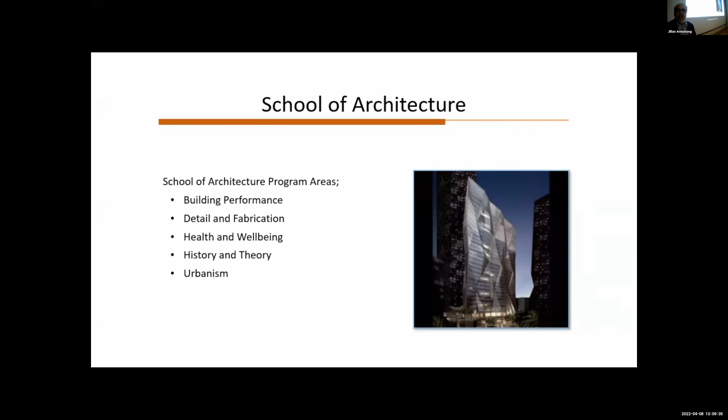I'd like to take the opportunity to speak with you a little bit about our Building Performance Program, who's the sponsor of this event today. Our School of Architecture consists of a number of programs which are focused mostly at the graduate level. They include building performance, detail and fabrication, health and well-being, history and theory, and urbanism. As I mentioned, today's program is sponsored by the Building Performance Program.

We address aspects of overall performance through the integrated design of structural, environmental, enclosure, and related systems. We have a very distinguished list of faculty in our building performance program, including my friend Jim, who will come up shortly. I'll introduce him as a Purvis Fellow. We're very fortunate to have him on our team for 2 years, and we're delighted that he was able to help us with organizing this event.

Areas of teaching and research for our building performance faculty include environmental systems, structure, construction, and comprehensive design. We also offer courses and seminars in specialized areas that some of our faculty offer from time to time.

As I mentioned, our programs are mostly focused at the graduate level. We have two concentrations in the building performance program that I'll describe, and a number of joint degree programs I'll also describe. These are formal concentrations that appear on your transcript as a student.

One is the building performance concentration, under the Master of Architecture, or MArch, degree program. That's been in place for a year or two and is very popular. We also have a structures concentration under our Master of Science in Architectural Studies degree program.

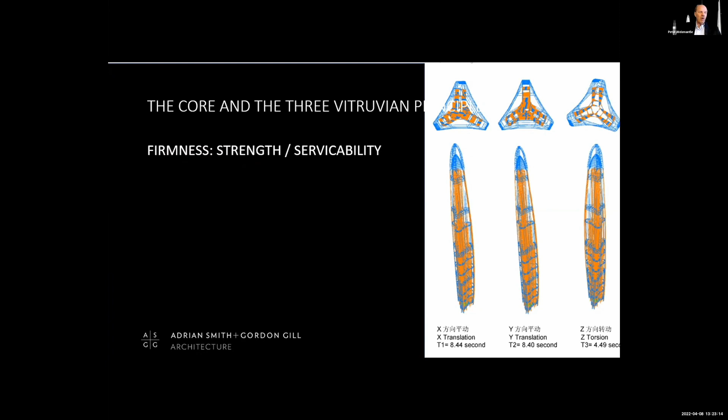Strength - it's what allows the building to stand up, basically. And standing up isn't just about gravity, because a tall building, especially a super tall, is really designed like a cantilever, a beam stuck in the ground. These images show the three modes of translation that every tall building needs to withstand with respect to lateral forces, wind, and seismic activity. The core is really the primary element that withstands those in the current crop of super talls.

Commodity is functionality, and that includes elements in the core here, things like the exit stairs, the service elevators, the toilet rooms, and the fan rooms. This construct allows the building to function - that's its utility.

So it ticks off all three Vitruvian principles in my mind. But we're talking about the primacy of the center core, and the primacy of the center core in the current typology is really not even debatable. Of all 58 super tall buildings taller than the Empire State Building constructed to date, basically all have a center core.

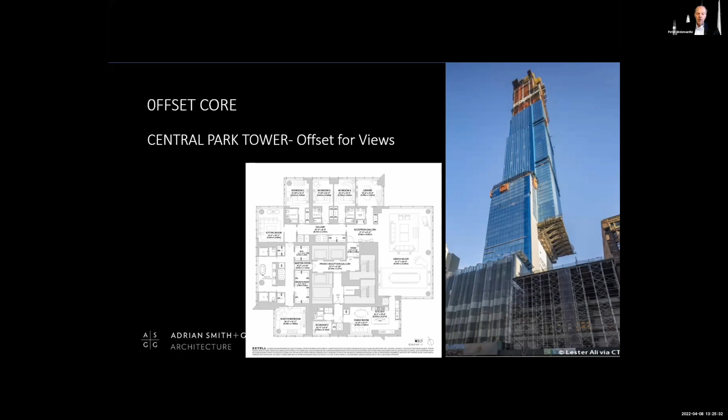Not that there aren't other typologies - the center core is not the only way to go. There are reasons that the core might not be in the center of the building. For instance, you might offset the core - this is an example, Central Park Tower, where the core is to the southeast of the floor plate, so that there can be unencumbered views of Central Park and Central Park West to the north of the tower.

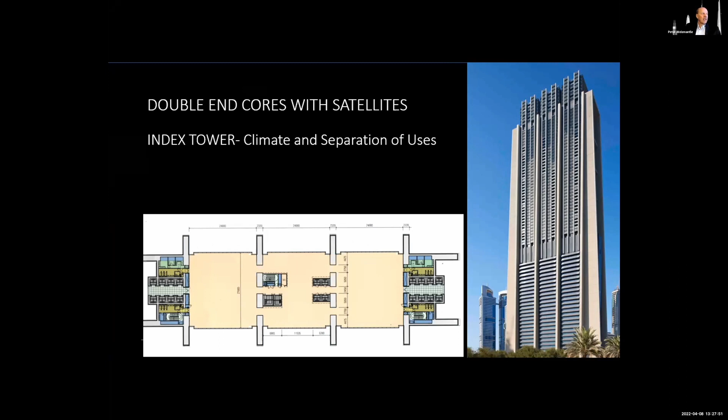But let's go back to the center core. Again, I said the primacy of the center core, and why is that? I think it ends up in the center for reasons of optimization and serendipity. It's the optimal structural location, the optimal location for occupant circulation, and the optimal location for services distribution, as well as allowing for a consistent perimeter and maximum perimeter lease span. It's also an optimal location for unencumbered views.

Furthermore, the serendipity part has to do with the structure. The constructability using reinforced concrete in the center of the building allows for greatest flexibility. It allows for the use of climbing formwork, which we'll talk about in a little bit. And also the fact that the core, being a very robust and thick-walled structure—in some cases we're going to talk specifically about a project in China nearing completion called Chengdu—the perimeter walls of this core are over 1 meter thick.

So it's a wonderful place, a great place. It's very robust, and it's a great secure place to put things like exit stairs, to put your riser shafts, especially for your fire life safety systems, in very protected, very secure positions.

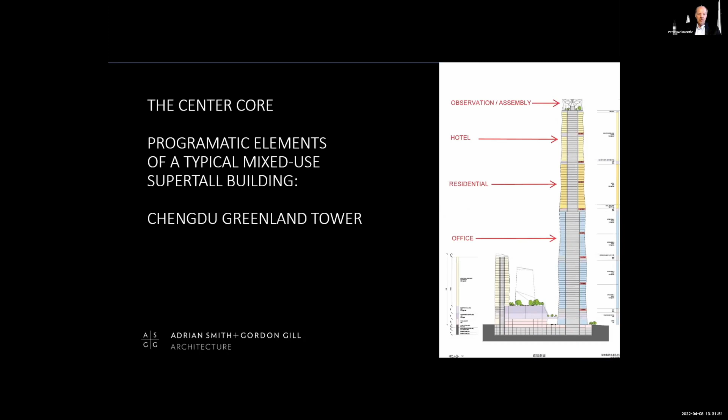The Chengdu tower is really a prototypical super tall building, mixed use, with approximately 120,000 square meters of office at the base of the building, this blue zone here, about 50,000 square meters of residential in this intermediate zone, and a hotel of about 48,000 square meters. Then at the very top, there's an observation/assembly space we call the Sky Club, in the crown of the building.

This tower is nearing completion in Chengdu, China. It's 468 meters tall, which puts it even taller than Jin Mao, but it's still well down the list of tallest buildings in the world these days.

So in the core itself, what are the elements shared by all super tall building types? First of all, occupant elevators—that's probably the most obvious. The occupant elevators and elevator lobbies, but also there's a whole set of elevators that serve for firefighting, for service, for freight, and for the back of house functions of a tower.

There's also exit stairs with landings and vestibules. There's also the MEP service risers and rooms, which very importantly include the smoke control, pressurization, and extract duct risers that allow the exit stairs in these very tall buildings to be free of smoke should they be needed. So in looking at that in plan...

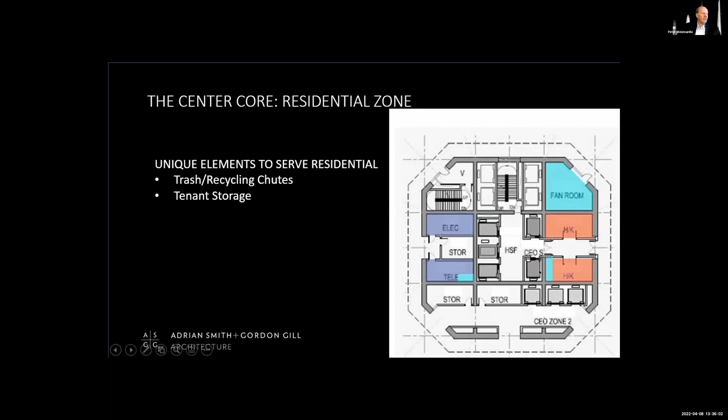As we continue up the building, we get to the hotel zone. Now several things have happened. The structural core still exists, but it's now become the corridor wall to the hotel rooms around the perimeter. The corridor for the hotel, serving the hotel rooms, is now inside the core. So the structural core still exists, but the architectural core has now shrunk down to be as minimal as possible. Remember, the owner of the building, our client, is making money from the area of the building that he can lease. So the smaller we can make the core, the more space is left over for the actual revenue producing uses of the building.

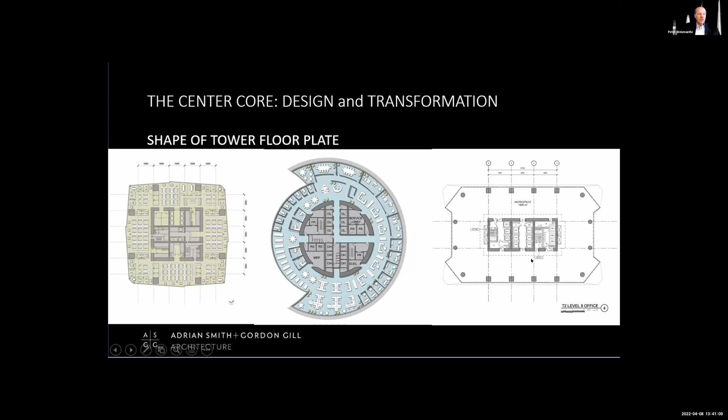Examples you saw previously: this is Jin Mao at the bottom, or this is a Jin Mao-like core, where at the bottom the building is actually more or less square. This is a circular core, again because of the shape of the tower floor plate. And then of course your kind of bog standard, very traditional rectangular core.

So let's go back to the mixed use elements, and I'm going to be talking a lot about Chengdu as I finish up my talk here. Remember, office, hotel, residential, and observatory or assembly at the top, the tower club.

The next element that determines how you can transform the core is perhaps the most important element. And I know Javier is going to be talking about breaking some ground in new technology being developed for elevators. But living in the present and having to get these things built, we still have certain limitations with respect to elevators, such as having maybe one or maximum two cabs in a shaft.

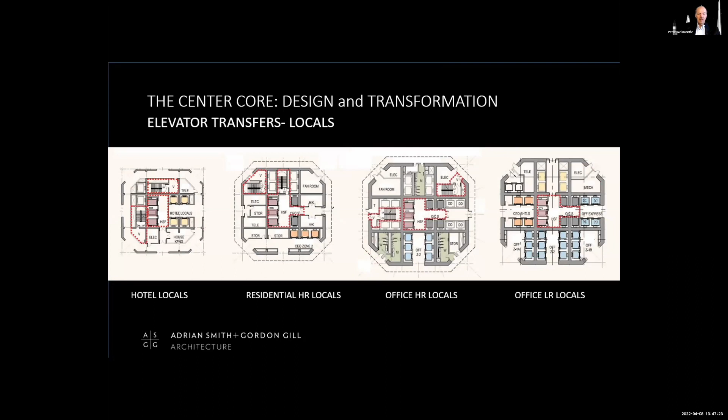There's also other local transfers that are illustrated, where each of these stacks of elevators allows for interconnections within uses. At the top of each of these stacks, there's actually a transfer point that allows an occupant from one local group to join another, so that within their zone of the building, they can transfer without having to go back down to the lobby. But again, as you go up in the building, you have fewer elevators and less encumbered space.

Another element that transitions is the building services - the mechanical, electrical, plumbing, and fire protection programmatic elements. Those consist of risers that generally go vertical, like elevators, but also horizontal distribution. You can see the MEP spaces in these multicolors - they start fairly large at the bottom of the building because of the loads that office space has compared to residential and hotel, until at the very top of the building you really just have a minimal amount of stuff.

But now, many of you are structural engineers - how does that affect the structure? The structural core actually transforms just like the architectural core transforms. In a mixed-use building, we have the opportunity to really drop off a lot of stuff as the building goes up. You can see the primary shear walls or structural walls of the core as you go up the building - the footprint becomes smaller, and the walls become thinner, in an optimization process.

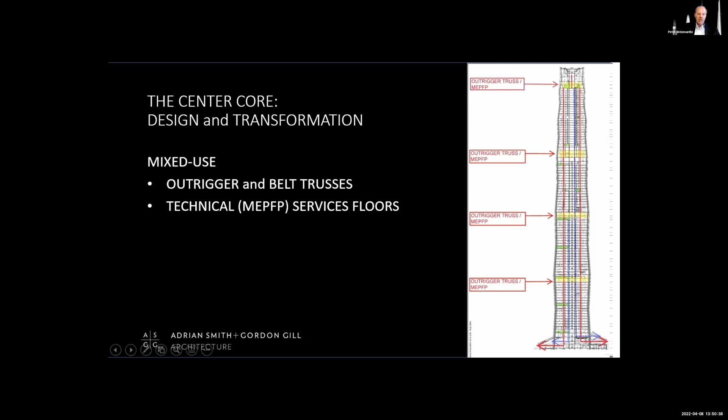The other element we need to think about in the transformation has to do with fire, life safety, and codes - specifically means of escape and firefighting access. My primary firefighting access is by the firefighting elevators, which in the case of most buildings in the world these days connect up to areas of refuge - a whole other discussion I don't have time for today. Then there's a connection with the means of escape stairs.

The means of escape stairs are always continuous from the top to the bottom of the building, but they are interrupted at areas of refuge, which have to do with places where the stack effect can be broken, and also access to the lifeboat elevators, which we're starting to use these days.

I'm going to finish up here quickly, just to run through the Chengdu core configuration and floor plate footprint configuration. You can see the perimeter of the Chengdu is more or less an octagon, but it's a 16-sided octagon - it's a faceted, tapered building.

As we go up the building, to the first office zone, the second office zone, you can start to see the building perimeter changes, and the elements in the core change as the elevators drop out. Then we come to a point where you'll see more elevators in the core, because the sky lobby shuttles drop off and we pick up the locals that serve the high-rise zone of the office. And as you may notice, the core walls start to get thinner, and the elements again start to change.

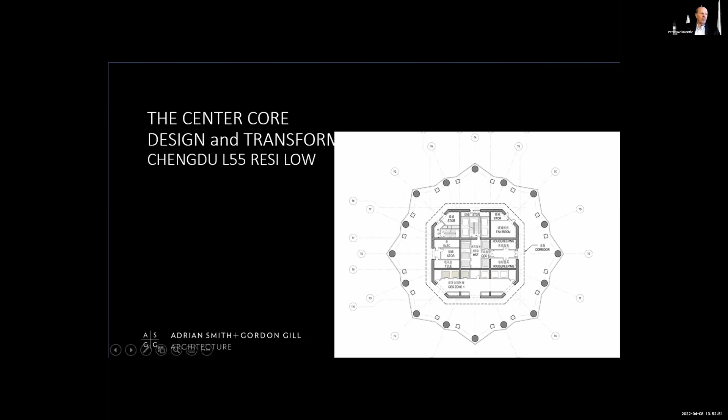We're now in the residential zone, so you can see we've evacuated a lot of the services from the core and replaced them with residential elements. Now we've entered the hotel zone at the amenity levels, and the hotel local elevators pick up because you've transferred from the hotel shuttles. This is where the outline of the core changes radically.

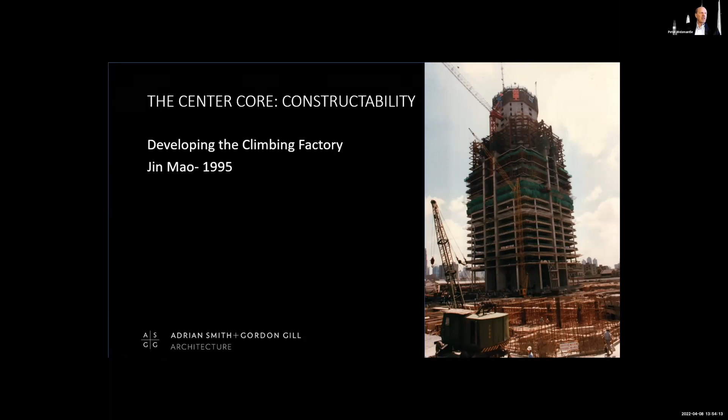So just to finish up, on constructability: when we were doing Jin Mao, this is a photograph from 1995. The climbing formwork was kind of in its infancy, having been developed for things like cooling towers on power plants, and it was being applied in such a way that by 2005 at Burj Khalifa, we really called it a climbing factory.

It actually consisted of three levels of activity. At the very top, they would be placing the rebar cages. At the middle level, they'd be pouring the concrete. And at the bottom level, you can see these jacks in place, but they'd actually be placing things like the elevator guide rails and such, so that as the building increased in height, as the core increased in height, there was this little climbing factory building the core.

And now I love this image because this is Chengdu under construction. You can see the octagonal core, and now they've actually incorporated the climbing tower cranes. The tower cranes are actually on a platform above the climbing factory, and I think it was a very comprehensive and integrated use of the climbing form.

And now these days we're even seeing things such as robotics being introduced into the system. Schindler has this robotic installation system for elevator guide rails and such that are happening down. Just to finish up, the center core has other variations, a little less simple, such as cruciform shear walls.

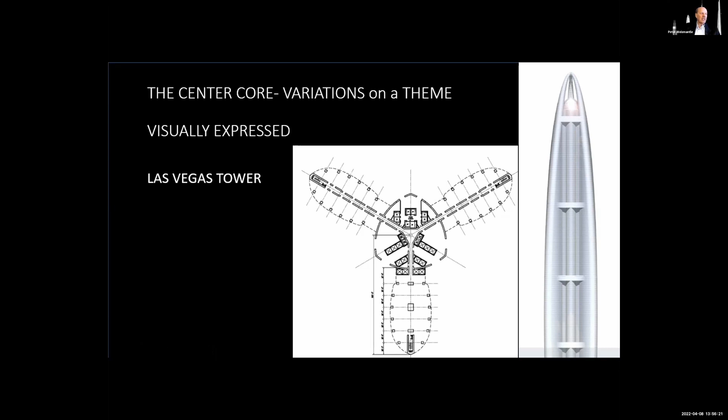This was a project called Las Vegas Tower. It was meant to be the world's tallest building at the time, but the actual structure is like an exoskeleton, expressed as the structural element in the center of the building. There are core walls that do it all.

And so with that, I'd like to thank you for the time that you've given me, and I hope you've enjoyed the show. And if there are questions, I look forward to answering them.

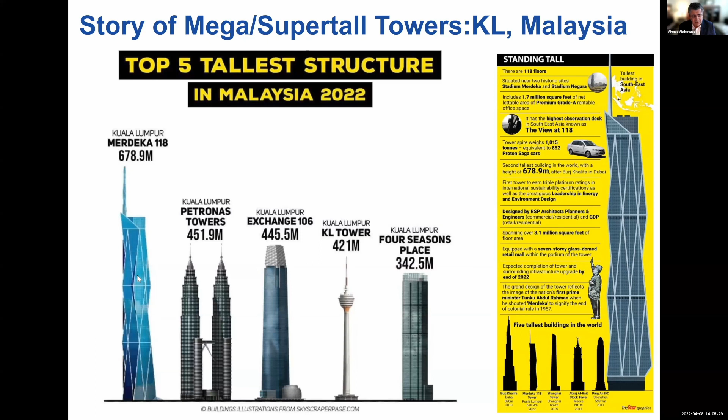That includes both the KL 118, the KL Tower, and also the Petronas Towers that you spoke about. In Malaysia, the Petronas Towers was the tallest building in the world for about 24 years, and now it's surpassed by the Merdeka 118.

Again, experience from the tallest - we have Burj Khalifa, Merdeka 118 - and this is during which Samsung has been able to work on these three major projects, which are some of the tallest.

Now today, the developer is PNB, which is National Capital Corporation, and National Investment Corporation of Malaysia, which is more or less like a sovereign fund. And they wanted to consolidate their offices at a single headquarter office in this prominent location.

The contract administrator on this project was Turner International. This project involves both international and local architects and engineers. For architect, FKA out of Australia was the major design architect, international architect, and RSP is the local architect of record.

The civil and structure design was initially developed by Lera out of the US, with Arup as the local structural and civil engineer of record. For mechanical engineering, Lera out of the US, and KTA was the local MEP company. The contractor of this project is Samsung C&T in collaboration with UEM Builders, a local contractor in Malaysia.

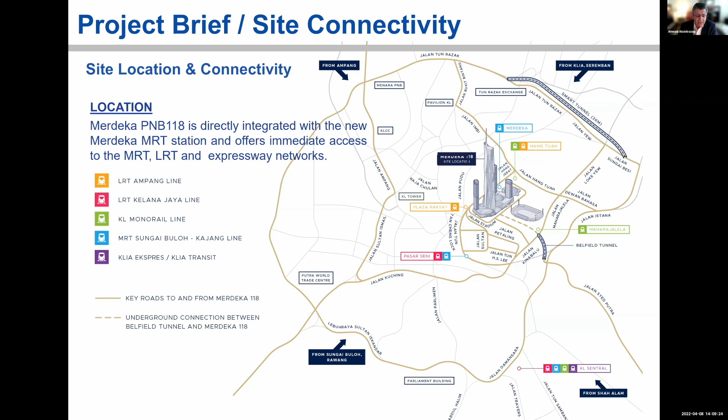A lot of traffic analysis has been done to make sure that the site can accommodate these stadia and also this big development that the client is proposing. Again, the site is very well connected - we have LRT lines, KL monorail, and so on and so forth.

Now, also from a traffic circulation standpoint, as I mentioned, this was a highly congested area from a traffic perspective. So the client has put a lot of investment into improving the overall accessibility to the site at multiple levels. We expect, in the base of the building, almost 100 additional parking spaces.

Now, the tower itself is a very large development, and it has to be really integrated with this prominent site, including the Stadium Negara and also the Stadium Merdeka. The architect made an effort to integrate the site, which consists of, as I mentioned, the 118-story office tower and hotel. Then also to the east, we have two high-rise residential towers and one residential tower, and also a very big retail plan.

The green part here that you will see is a promenade which allows access to the Merdeka site, an integrated part of the site, and also open to public use.

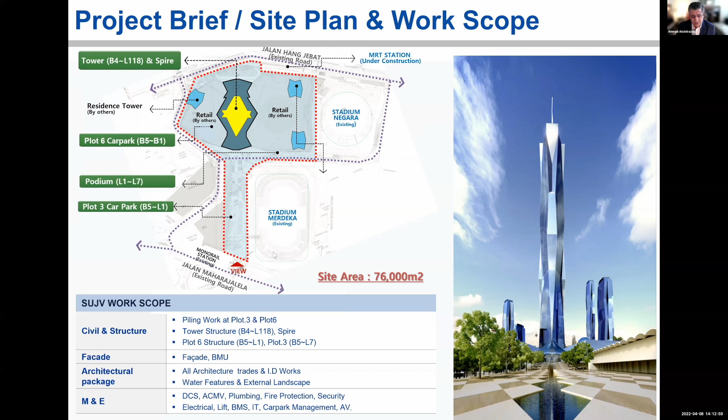One of the interesting things about the site is that it's surrounded by essential facilities, so we have deep basements around the entire site, and we have a shallow foundation. These stadia are located nearby, which impose a huge amount of demand in terms of the amount of movement that we can tolerate. It's also surrounded by MRT stations just around the site. So managing the site during construction and managing the movement for this essential facility was one of the most challenging things during construction.

The blue part you'll see here, the other complexity of the project, is Samsung UEM's scope, and then the one in green is by another contractor, Hamazaki, and we also have a third contractor involved, and a fourth contractor involved in building the retail. So in terms of managing and coordinating all of these, we are in the middle of everything. The work itself was extremely challenging. I spent about 2.5 years full-time on site to ensure everything was fully coordinated and executed without any kind of hiccups. As I mentioned earlier, managing the movement was extremely critical on the site.

Now, progress of the construction: as you can see here, as of October, before we lifted the spire, this is what the project looked like during preparation for the final lift. In December 2021, this is what you see here. And in January, the spire was completely lifted, and this is what the building looks like today.

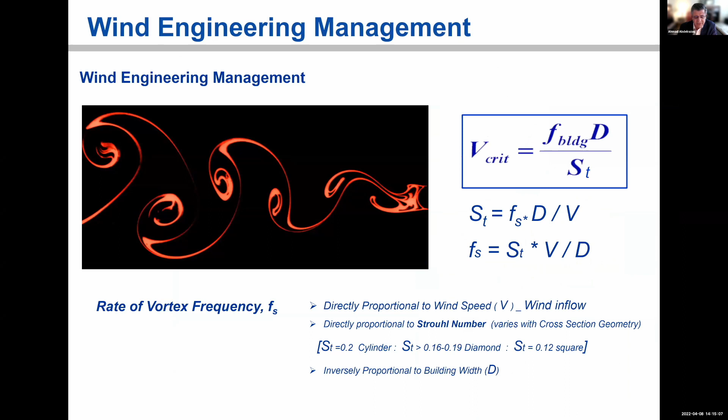For this particular project, from a structural standpoint, if the wind is blowing in this direction, you'd see that the neutral axis of the building is here. So essentially we didn't have a lot of depth. But when you look at this building and its shape, your first impression is that there's a lot of variation in the shape, which means from a wind engineering standpoint it's going to perform not too badly. However, the indentation of these elements was not large enough - in fact, they aggravated the wind effects. So when the wind blows in this direction, it acts like a foil, in which the crosswind response was extremely critical, more than expected, resulting in forces even bigger than a similar building in a more severe wind environment.

KL has very benign wind conditions. As you can see here, the basic wind speed at Merdeka, in KL, is about 35 meters per second. But if you look at Shanghai, Seoul, or Busan, and look at a building of this size, essentially the magnitude of the base overturning moment and the shear were very much less than what we had in Merdeka, and that was a result of the crosswind response and the dynamic excitation that the building received.

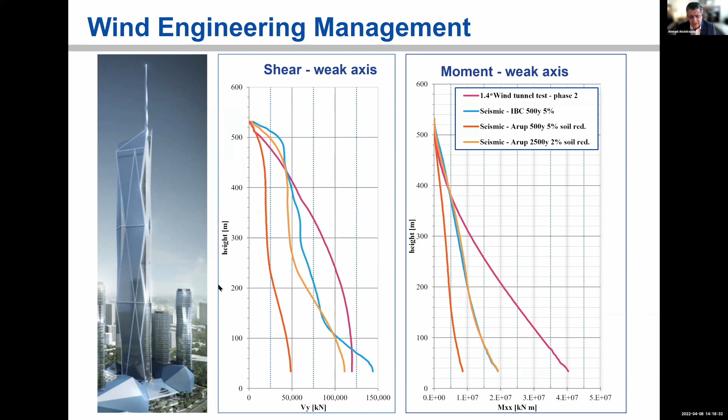Regardless, this building is sitting in a very low seismic zone. There is no seismic record, but Indonesia is nearby, so there's a far earthquake effect we needed to deal with. For all practical purposes, this building was controlled by wind effects. From an acceleration standpoint, through managing the stiffness of the building, acceleration was within acceptable limits. The building mode shapes were about 12 seconds and 11.13 seconds in the other direction, and torsionally about 3.93 seconds.

Some of the challenging aspects of this project: essentially the project is founded on 138 bored piles, roughly on a 4-meter raft. We also have 8 mega columns, and the core wall has what we call a hammerhead, a very large, massive element which is 7.4 meters by 4.3 meters - big, massive concrete. The mega columns are also pretty big, going up to 4.3 meters in size.

The other thing is the outrigger, and we have a lot of transfers between the outrigger and small columns that I will speak about. At the top of the building, we have the spire, which is very thin and difficult to reach by crane, requiring special lifting for this particular system.

The structural system of the tower essentially consists of the center core linked with outriggers at 3 different levels: from level 40 to 43, from 75 to 78, and 113 to 116, both in the strong and weak axis. In between, what you see here is this red column.

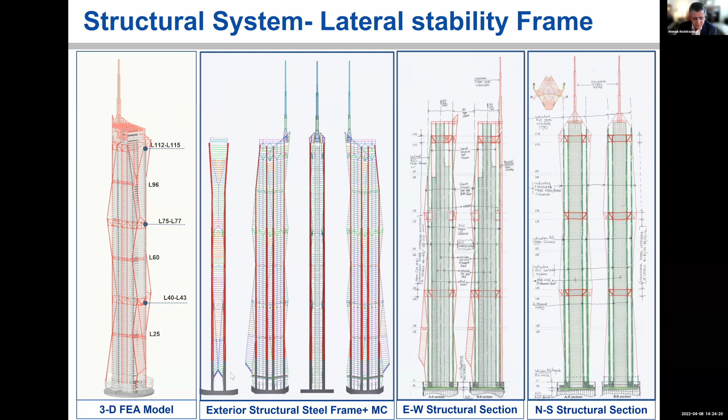This is another view of the structural system, the unfolded view of the perimeter of the building. As you can see, it's pretty complicated. The green line is where the outrigger is, and all the red lines indicate where the structural steel members are. Managing the differential movement in these elements, which could impact the facade and the levelness of the floor, was extremely critical. This is looking at the view from the outside relative to the spire.

Again, the outriggers are really very massive elements, as you can see here. This is the scale of a person relative to the size of these structural members, which are built-up steel plate. Initially, the original design was two plates. It was very difficult to manage, so I replaced it with a single plate to improve the constructability and rebar arrangement.

This gives you an order of magnitude of the scale. When we redesigned initially, the structural engineer required these elements to be cast. With these big size elements, it's really very difficult to do such a casting without having too many things to worry about. So we essentially suggested an alternative design where we made that out of structural built-up steel elements.

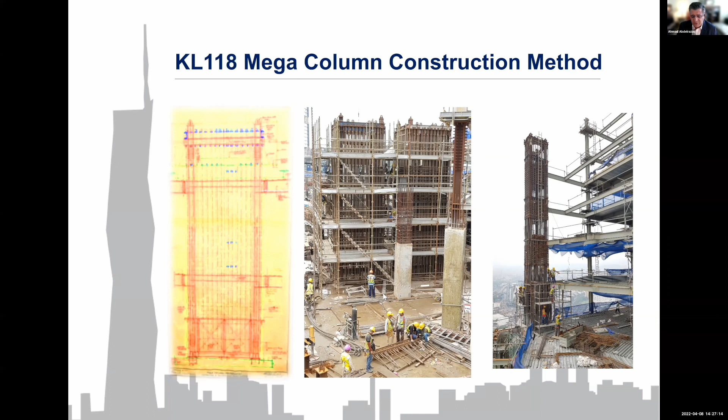This is the scale of things. This is a person, giving you an order of magnitude of the size. This is a pre-assembly yard that we used to prefabricate and pre-assemble these very large elements.

Again, the interesting thing about these columns is that TC1 and TC8, the corner columns, are roughly the biggest size, at 3.2 by 3.65 meters. TC2 is in the weak axis, and TC3 we have up to about 3.2 and 4.4 meters. These are pretty huge, but through this pre-assembly of the steel and rebar, we were able to use templates and jigs to make sure all the rebar fit together. As you can see, we worked on 3 different levels to speed up the construction and assembly of these elements.

The other challenging aspect of this is the hammerhead. This is about 7.4 meters by 4.3 meters, a massive concrete element. So you think about the heat of hydration, the temperature, and how you manage that to prevent cracking in these elements. Plus, it's a bit complicated as per the original design, the amount of horizontal ties that we needed to do.

Again, we did a lot of studies in terms of providing an alternative system. This one is definitely a huge element where we have the center core here, but we were able to propose an alternative system in which we divide this element into like 2 columns, and they are confined.

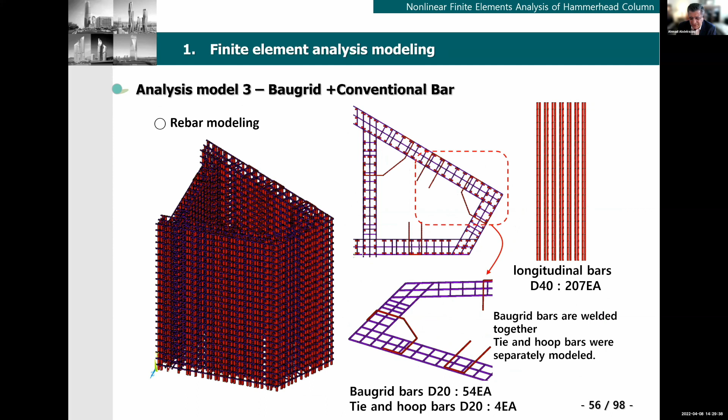Unfortunately, structural engineers were not comfortable using such a system, even though we have proven that it is something we can do. The code does not address how to deal with these massive elements in detail. So I think going back to the basic principles of structural engineering and concrete, you can come up with a really interesting idea. We ran a very detailed ABAQUS analysis to show the viability of simplifying the detailing for these major elements.

The key point I wanted to make is the core for the original design is so huge. With this new approach, we were able to divide it into smaller units using Baugrid, which is a pre-assembled kind of rebar where all the horizontal elements are welded, fused together with more strength than a typical tie. In terms of behavior, this is the core of the column, and by dividing it the way we did, we divided it into two columns, making the system a bit more manageable. So at this moment, because of time, I'll just give you an idea of what can be done and simplification using new technology.

This could represent a research project by itself that somebody can take on. In terms of performance, we have two models, the original and the new, and there is no significant difference in behavior. We took it up to the ultimate behavior, and there's no difference, but in terms of constructability, it does make a huge difference. The other challenge to this project is the planning for the concrete work.

When we proposed C105, the client and the consultant were worried, because with a high performance concrete with high stiffness being used for the first time in Malaysia, pushing the limit from 85, which had not been exceeded since Petronas days, to C105 was something we had to work very closely with the client on.

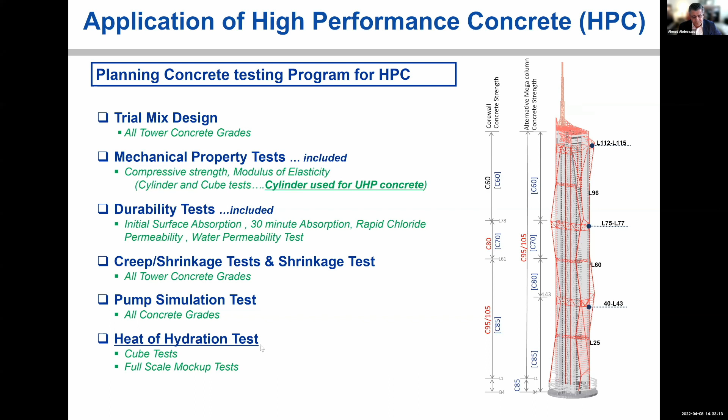We did all the testing that we have to do: mechanical properties, mass concrete, 3-day cycle, high pumpability. These are the criteria we had to put together in order to produce a concrete that we could use to build a building from. It has to satisfy strength, low heat of hydration, 3-day cycle, high flow, high durability, and we also put together a very extensive testing program on site to make sure we could pump the concrete to that level.

Curing procedures also required testing in terms of how to cure the concrete, and in Malaysia it's hot weather concreting, so we had to manage and control the temperature of the concrete at deposit and the maximum temperature reached for these massive elements. So we did a very detailed, extensive quality control program for this, and we added a batch plant on site.

We did testing for all the requirements to ensure the client that we achieved the concrete strength and stiffness we needed. In fact, we exceeded it. To give the client comfort, we told him: okay, we have C105, but we will use C95 for strength design, because that didn't really make a difference, since what we needed it for was stiffness. The initial design had about 40.5 gigapascal. We gave them about 45 gigapascal, and we achieved almost 50 gigapascal.

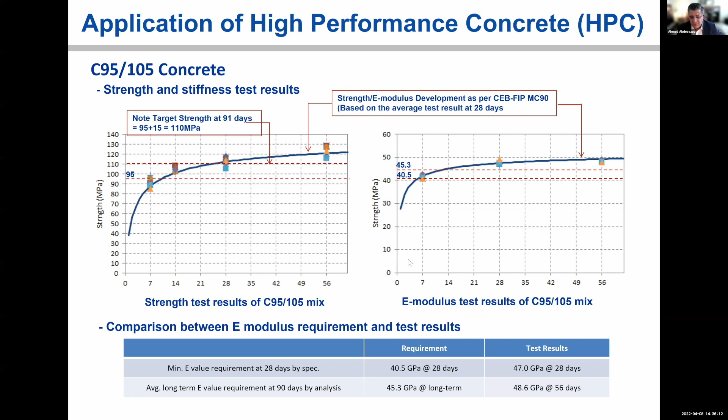We had to monitor what we promised the client. It became more like a research program in which we were able to achieve strength up to about 120 MPa for cylinder. And for modulus, initially we promised the client 45, but we were able to achieve close to 50 gigapascal, which is a significant benefit to the project from a stiffness standpoint.

So fortunately for high strength, high stiffness concrete, we put a batch plant on site so transportation was not a major issue, and we have an icing machine to shave ice to put into the mix to control the temperature at deposit to within 25 degrees.

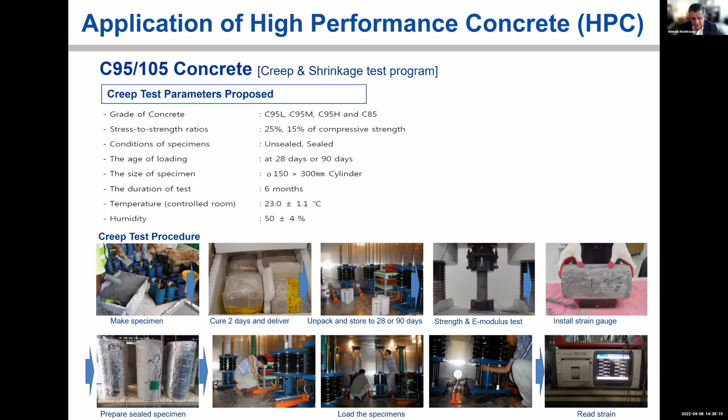We have done an extensive creep and shrinkage testing program for all concrete grades, just to make sure that what we are predicting in terms of building movement is accurate enough. With this, we established a concrete testing program at Samsung Laboratory in Korea, where we had real-time monitoring of the entire testing program, including temperature, strain gauge, and all kinds of parameters, to achieve the ultimate shrinkage and creep parameters for this.

In summary, the question is what we did with all of this. The client required that with the value engineering we proposed, we needed to achieve the same performance that we have on the building. So we did. And when we look at what kind of parameter we should use, especially for modulus of elasticity, when you look at the code, they are all over the place.

We were able to, using high stiffness concrete, provide a building with exactly the same stiffness as the original design. So confirming the design alternative relative to the building drift for both the X and Y directions, there was no significant difference between building performance with the reduction in material when using high performance concrete.

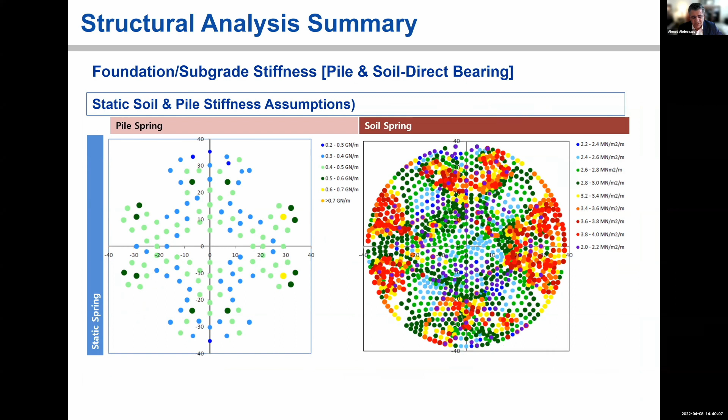The other thing we need to look at during construction is levelness and column shortening. We also looked at the soil structure interaction, looking at the actual pile stiffness and the soil spring stiffness that we have, and we had to do that as part of the construction sequence program that we had done.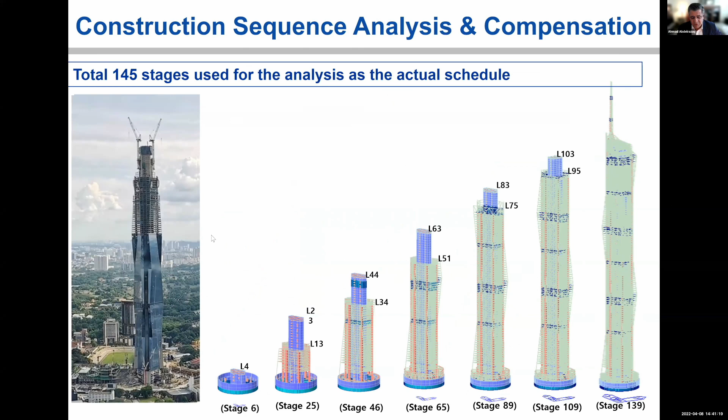In fact, the load on the pile has been reduced because we reduced the weight of the concrete by about 15% in the core. The other thing we need to look at is a construction sequence analysis, which is one of the challenging things—relative displacement between the core movement, the core wall, the structural steel elements—and all these testing programs related to the concrete, we had to include as part of the analysis.

If you look at the E-value that we used, it's essentially much higher than what is allowed by code. Out of the testing program, we achieved these coefficients which we needed to implement.

This is really a creep and shrinkage verification issue. If you look at the model codes—whether AASHTO, CIP, Eurocode, PCA, CEP, or GL 2000—everybody has their own methodology. The question is, when you have these massive elements that are sensitive to building displacement, which code do you use?

Fortunately, by using the actual testing program that we incorporated on the project and on site, we were able to get the actual creep and shrinkage results, and we saw that the CEP, or the European code, and the Korean code were the closest match to what we had done.

The other thing is the stiffness of the soil is much bigger than originally anticipated, which means it's also affecting the differential movement of these elements. So we also had to modify that.

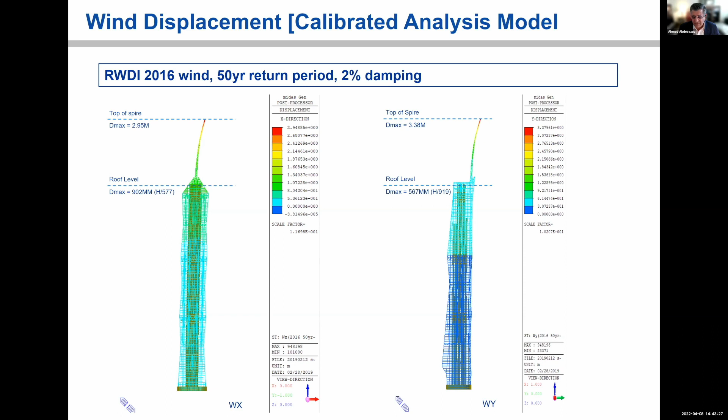What you'll see here is the displacement of the building has been reduced from the original design, because we get more stiffness—from 45 to 50, about 10%—but also we have a stiffer foundation, so we're able to reduce the overall deformation of the building and get a better performing building using high stiffness than originally designed. We've been able to manage that very well and give the client a building with less material and better performance, without significantly changing the structural system.

The other thing we need to deal with is this intermediate column between the mega columns, where we have a differential movement we have to deal with. So we ran a monitoring program.

Very closely, and as you can see here, the maximum initial displacement expected by the engineer was about 118 millimeters, but we actually got only roughly about 45 millimeters. Looking at the actual behavior of the building, the lateral displacement, because of the asymmetry, we expected the building to drift about 220 millimeters. Because of the calibration we had done, we were able to achieve very close to what we expected.

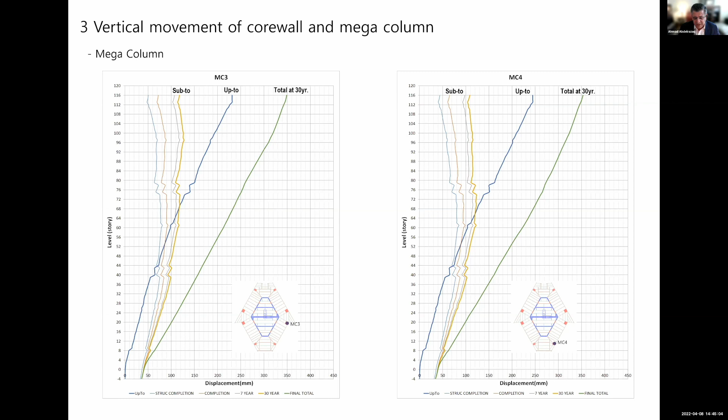This testifies that everything we tried was correct. Through this process, we were also able to reduce the differential shortening between the core and the column by equalizing the stress, eliminating the shrinkage to more or less the same level. The basic creep was the only thing left to deal with for these elements. So we were able to manage the differential pretty well.

In terms of the differential between the steel column and the mega column—the blue line you see here is the location of the mega column, and the dots in between are the location of the steel—we had to monitor that movement very closely to make sure that in the long term we don't have a big differential between these elements that could impact the facade and performance of the building.

We did that at several levels, and we identified some areas that would be problematic, where the movement was higher than what we wanted to see. So we developed a compensation program and correction for the structural steel elements as we built them. You'd think concrete is going to displace more, but in this case, we have the steel displacing more.

So we had to make a correction for the structural steel, in which we adjusted the steel member sizes by roughly about 2 millimeters, and we were able to manage the differential between the structural steel members and the mega column to within 5 millimeters. That's also monitored at every floor to make sure we can achieve that.

The other interesting thing about this building is we incorporated a very detailed, extensive health monitoring program that monitors the health of the building, starting with accelerometers at the base to capture any earthquakes coming into the site during construction or for permanent building conditions. We have settlement marks, anemometers, accelerometers, and strain gauges in all the columns to measure the stress, strain and movement.

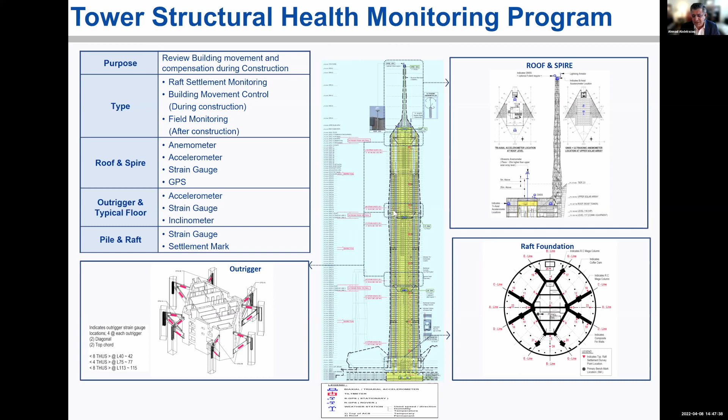At the outrigger levels, we have dynamic strain gauges to not only measure the stress in the outrigger structural steel during construction, but also the wind forces it will get in real time. So this building is what I'd call a digital twin, in which we're trying to investigate the actual behavior - what we designed versus what we actually measured in the building. We also have tilt meters, because the building drifted a lot, to have a real-time assessment of the building behavior and ensure verticality during construction.

I'm sorry, could you - is there something we could do to wrap up? I'm sorry, we're a bit over on time. Okay, I will finish up.

Just an overview from a construction methodology standpoint - it's a very complex site. Definitely we need to look at the site logistics and planning. This is just some of the overall site conditions.

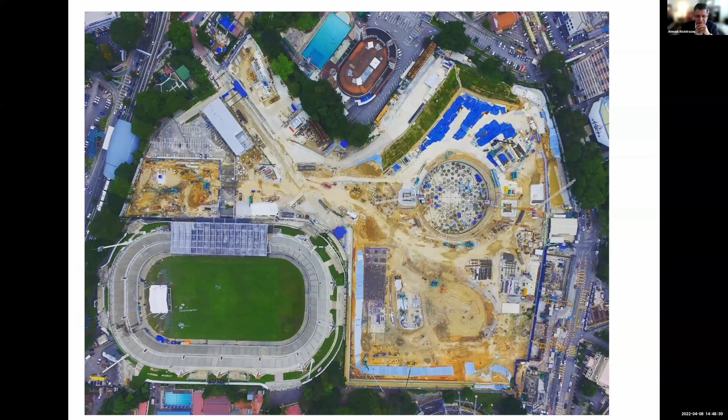And also for the raft foundation, we had to cover the entire area with a temporary fabric cover because we needed to cast it over 48 hours, so we wanted to make sure we weren't affected by rain or unexpected conditions. This is where we pumped the concrete down into the raft, and we poured it in a single shot.

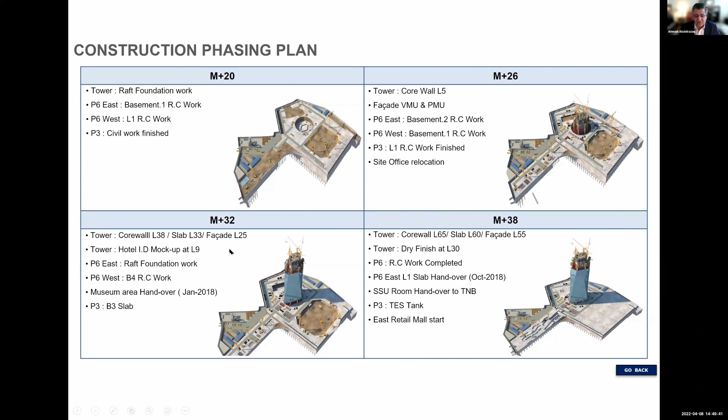This is the overall construction planning for this project, which is a semi top-down construction, with the tower built from bottom up. This is a view of the semi top-down construction we incorporated, without the cross-lot bracing that's usually used in China in particular.

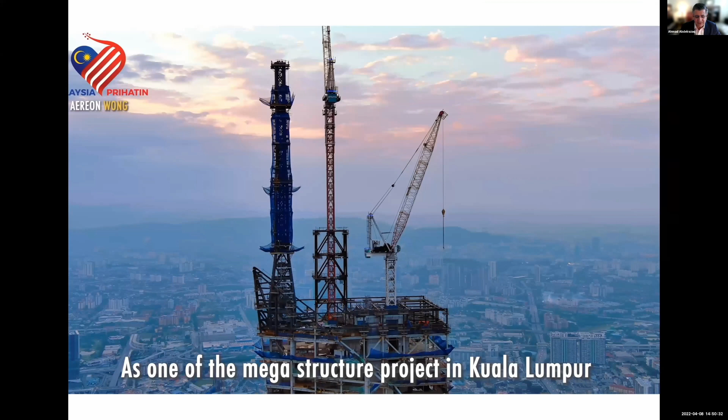Today, more or less, this is before lifting the spire. Lifting the spire itself is very challenging - we had to create a lifting device where we telescoped the entire spire from below. This is a quick view of the lifting of the spire using hydraulic jacks, similar to what we did in Burj Khalifa.

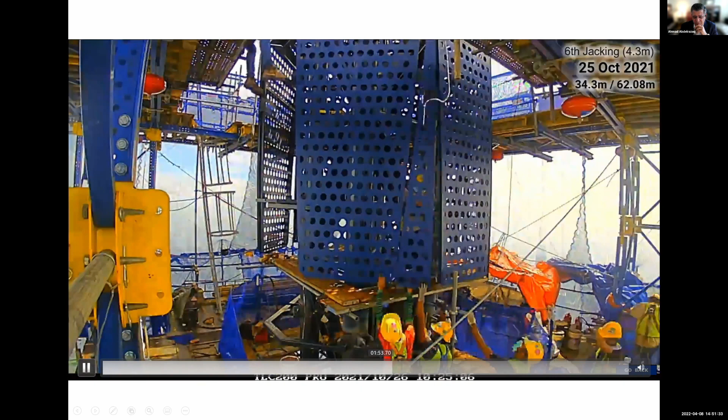As you lift up the spire, we added the cladding and all the architectural components, lifted in one shot - this is just sped up to show the process. The spire is very thin, and we were able to attach the facade to it before lifting it from a single lift location.

So this is the final lifting of the spire. Again, each one of these topics could be a topic on its own, given the challenging aspects of working with these very massive elements.

And with that, these are just some views of where the project stands right now. And we'll close with a word on the use of concrete.

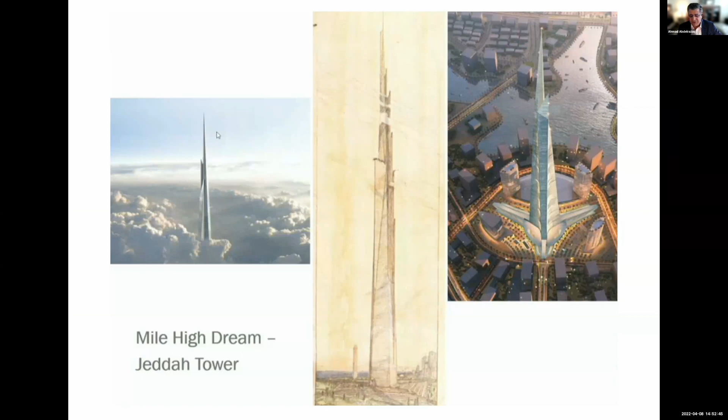Definitely concrete is becoming more of a molding material - it's no longer the concrete we learned about in the past. It's becoming more of a composite material, and a beautiful material to use if used wisely. With this, I think we also need to keep in mind that modular construction is something, with new building systems, we need to consider for the future use of concrete.

Again, we use composite walls, all of these things to avoid many of the temporary works that we typically do nowadays. So anything we can avoid, moving into more modular type of construction to maximize the off-site work rather than on-site work. And with that, I end my presentation.

I had a couple of videos, but short ones, but because of time we're not able to show them. Thank you very much, sorry for being late.

All right, well, thank you, Ahmed. That's a great presentation, a great building, a lot of good information about construction technology with respect to concrete.

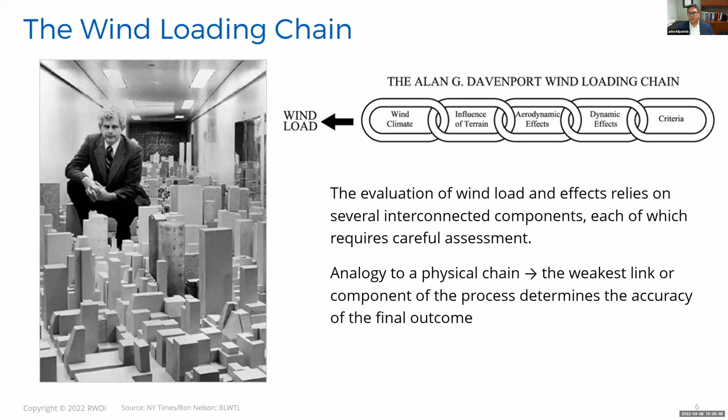So where do we see the wind loading chain concept? Well, we see it in codes of practice. We have basic design wind speed maps that are part of the wind climate link. We have exposure factors and topography factors that account for the influence of terrain. We have pressure coefficient and force coefficient data that tells us a little bit about building aerodynamics. We have gust factors that deal with the dynamic effects. And we have basic criteria outlined in the standards.

In the wind tunnel, we tend to do things in a bit more detail, using the same concept. For the wind climate, we do more detailed studies and perhaps come up with site-specific wind speed recommendations. For the influence of terrain, we do detailed modeling of the surroundings, terrain and topography. For building aerodynamics, we do bespoke wind tunnel tests, either for the building envelope or for the structure. For building dynamics, we're working with structural engineers' finite element models, providing feedback on the variation of wind loads with wind direction and how they're impacted by building dynamics.

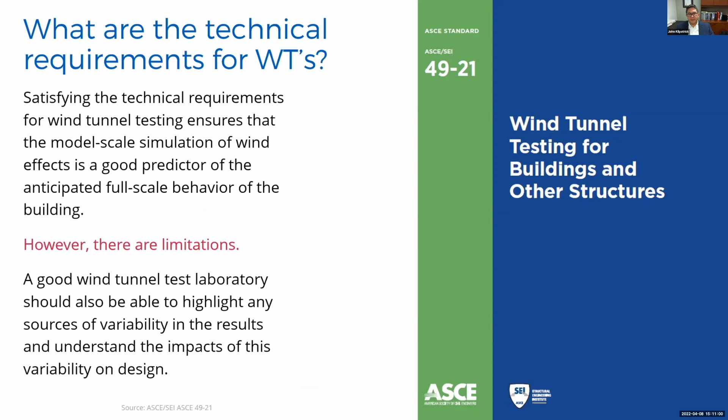When you're doing wind tunnel tests, there are some basic technical requirements that need to be satisfied to ensure that the model scale simulations of the wind responses will be good predictors of full scale behavior. I'm going to go through some of these technical requirements. There are limitations, and I'll touch on one or two of those later.

In simple terms, the first thing you have to do is model the expected wind velocity profiles. The wind on the surface of the Earth is called boundary layer winds - they vary with height. In order to have an effective simulation in the tunnel, you need to model those approaching wind velocity fields, what we call far field effects.

You need to model the turbulence or gustiness of the wind. The turbulence varies whether you're in open country, at the seaside, or in a major urban center. It varies, and we need to model that reasonably accurately. There's a little bit of leeway here when we model the turbulence, but not a lot if we want to do a good job.

It goes without saying that you need to have an accurate model of the development. In the wind tunnel, when we do a test, we're building scale models, typically 1 to 300 or 1 to 400 scale. We build the study buildings and the surroundings, and in the wind tunnel, our simulations of the far field - the velocity flows approaching the site - interact with the surroundings to create and simulate what we call the near field effects.

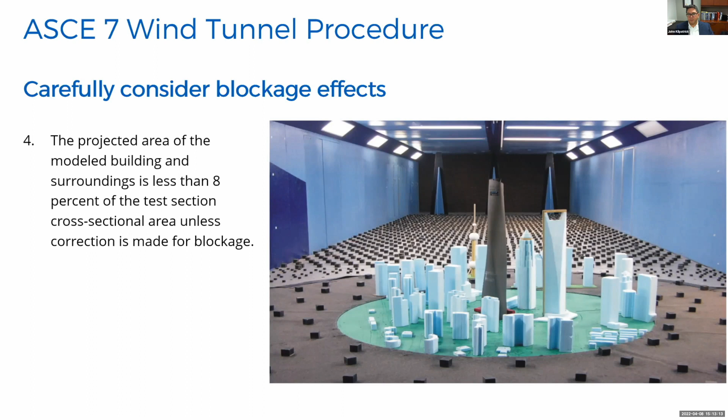A question everybody might have is, how well do wind tunnels perform? It's a tough question to answer because, in truth, there is not a lot of full-scale data that has been gathered with direct comparisons of predictions done against that full-scale data.

One major exception was a study in Chicago that took place from 2000 to 2005. RWDI was part of that, SOM supported it, and we looked at a number of buildings in SOM's portfolio. We repeated the wind tunnel studies, took full-scale measurements of the building motions and behavior, and compared analytical models of the structure with the full-scale measured properties. So there was a significant validation program undertaken, and I'm happy to say this won an award in 2008 from the ASCE for being a state-of-the-art study in civil engineering.

So I'm going to jump into the case studies now. I've picked a number of buildings that were part of the graphic I showed earlier, and some that were not. I'm going to start with Taipei 101.

This was a study we did quite some time ago, in 1998. It's a tower over 500 meters tall, the tallest in the world at the time. It's located in a seismic region where there are typhoons regularly. The design team worked with us to optimize the performance of the building because the initial tests indicated we had some work to do. A TMD was also employed in this building to provide the level of occupant comfort we were after.

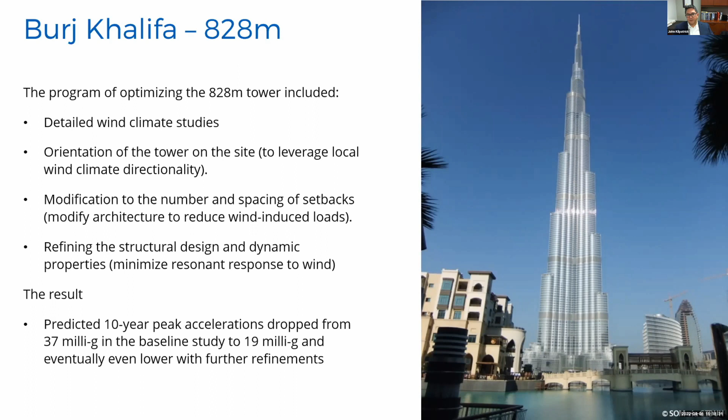So these detailed climate studies, what do they involve? Well, just as a bit of background, wind data that's available to most researchers are surface level measurements taken at 10 meters above ground. We're talking about a building that's pushing beyond 800 meters in height. So we need to understand how to relate that extreme wind speed at 10 meters to the winds at elevation.

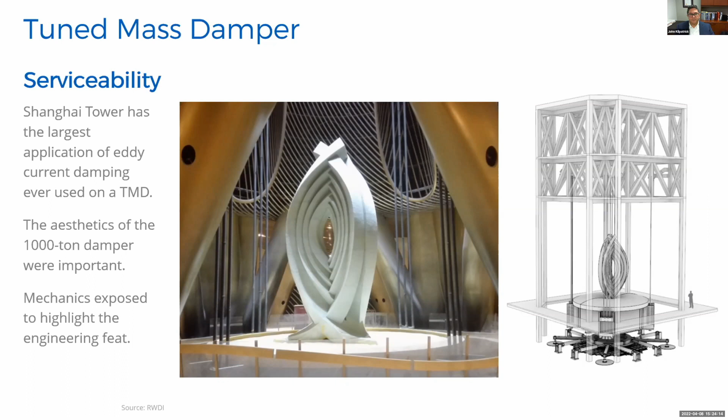Jeddah Tower was not quite complete yet, but it has many of the things that we've already seen through the presentation that could be considered strategies for optimizing tall building response. We've got a significant taper with height. We've got a plan form that's broadly similar to Burj Khalifa. We went through a program with the client here, looking at detailed studies of the climate, lots of tests using the force balance, pressure integration, and aeroelastic model techniques to validate the measurements and confirm. And we also introduced a technique here, which is now quite common, but at the time it was novel, called dynamic optimization. A little bit about the climate model.

Jeddah, the location of this tower, there's some topography nearby, which meant we wanted to understand how that topography might affect winds at height. And keep in mind, this tower is over 1,000 meters tall. So we needed to do that climate modeling again.

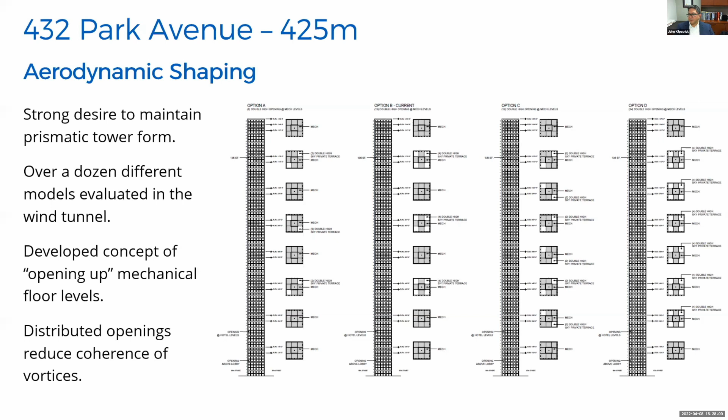We used the concept of opening up the mechanical or technical floors to the flow, allowing flow to effectively blow through the structure. What that tends to do is reduce the coherence of those vortices that create crosswind motions. That was effective, it reduced accelerations by 50%, which is great. You can see one of those open technical floors in the image on the right; there's at least 5 levels on that building. We still needed damping of at least 6% to hit the performance target.

This is an example of performance-based design I'd like to share. We use a motion simulator for this project and several others we saw earlier. What we do is feed time histories of the motion of the building that we get from the wind tunnel tests, and bring the design team into these motion simulators to experience the motion themselves. It's the next best thing to being in an actual structure, and we can cast images of the cityscape on the walls around the simulator.

With the design team, we decide on the target performance criteria, and once we have that, we can work out how big a damper we need to get there. On this particular building, there are 2 proposed pendulum dampers totaling 660 tons, the largest passive dampers worldwide.

I'm nearing the end of the presentation, just going to revisit the wind loading chain quickly. One limitation of our wind tunnel tests is that we can't simulate Reynolds numbers at the small test scales we usually test at, 1 to 300 to 1 to 400 or 500 scale. That isn't a problem for structures with sharp edges where flow tends to separate from those edges, but it can be a problem for curved structures.

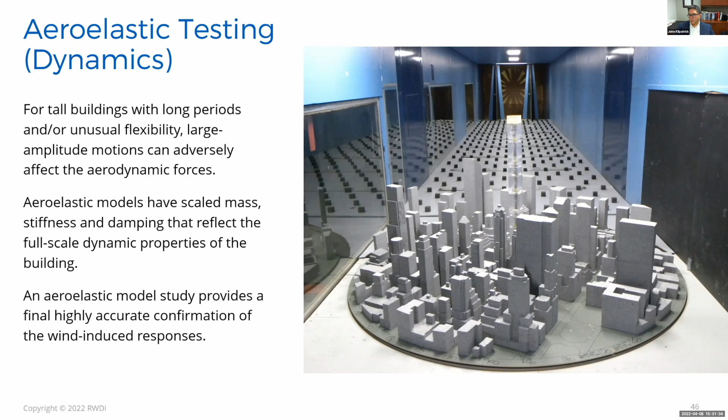Performance-based design, I just want to touch on that. I talked a little bit about it in the context of looking at criteria and setting the criteria for buildings. Most tall building design is linear elastic.

There is now a framework in the pre-standard for performance-based wind design that allows certain elements of the building to become inelastic. The goal is to allow this approach, which could lead to better, more efficient, more cost effective structures. The trick, in order to do this properly, is it's quite computationally intensive, and you need wind tunnel generated time series to do that. So that's an area where we're working a lot today.

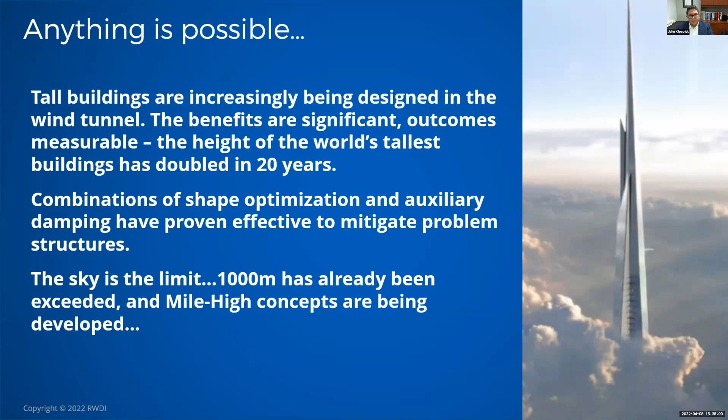Thank you, John, for an excellent presentation. One question I have, maybe to lead off here: you went through a number of case studies, which are great, and illustrated the different strategies that have been used. In your opinion, what are the most effective shaping strategies that can be used for super tall and mega tall buildings?

Well, I would say tapering the building and reducing the sail area at elevations. That's critical. But you also have to think about the actual shape of the building. A tapered building that's square still has higher inherent loads than a more circular form building. So I think more streamlined shapes that taper with height are generally more successful.

I think there's a lot of aerodynamic treatments that can be used to improve the responsiveness of buildings. The spire on top of 118 that Ahmad showed earlier, I'm not sure if everyone picked up, but the surface of that spire was porous, and that's intentional. It was done that way to reduce the across-wind loading acting on that spire. So you have to think consciously about how to minimize the wind effects on the structure, but tapering and using the building aerodynamics to good effect is important.

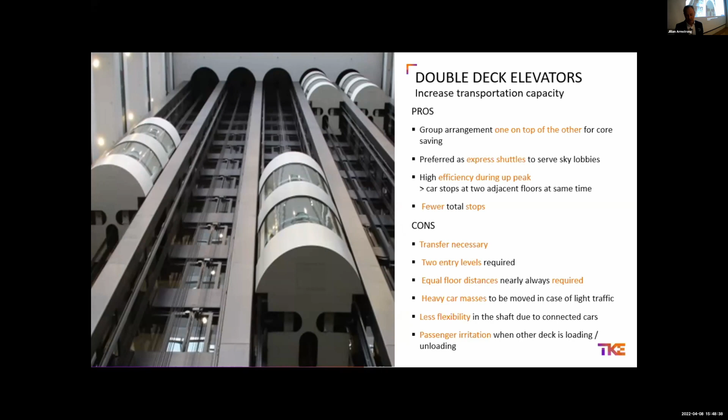Sometimes from a user perspective, we have seen passenger discomfort because of what is called phantom stops — we might be loading the upper car and the passengers in the lower car don't know what is happening, but the elevator is stopped. That's a technology issue that most of us have.

We have supplied one of the fastest double decks in the world for Shanghai World Financial Center, a building of almost 500 meters, energy efficiency class A. So we know about this technology.

What was our challenge? In 2003, we started to think: what if we were able to decouple the cabins? What if we were able to invent a system where we can move 2 cabins independently in 1 shaft? By using something like this, we might be able to reach the same traffic performance while reducing the elevator shaft footprint.

Reducing 30 to 50% the elevator shaft footprint, we can save building space, reduce waiting time, because at the end of the day we are going to select the cabin that will take us quicker to the destination, and we can optimize traffic handling. Let me show you this technology in a short video.

Our lifestyles are changing. Our traffic conditions are changing. Everything is changing. When taking elevators, racing against time, you must be aware the traditional methods cannot satisfy today's demands. TK Elevator leverages the ability to innovate by developing the twin elevator system to meet this challenge. Twin has 2 independent cabins in the same shaft, which saves 30 to 50% of the area of elevators, reduces construction costs, and makes it possible to build extra shafts in modernization projects when conventional vertical traffic elevators make barriers. TK Elevator designed elevators that enhance flexibility.

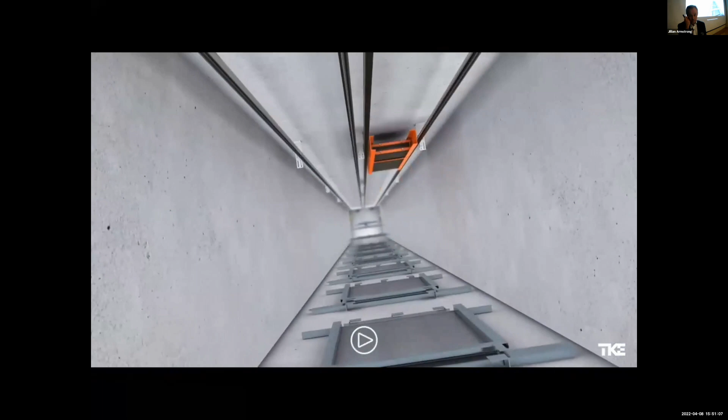Buildings with various floor distancing. During traffic peaks, TWIN's control system ensures that the 2 cars operate independently while increasing capacity by 30%.

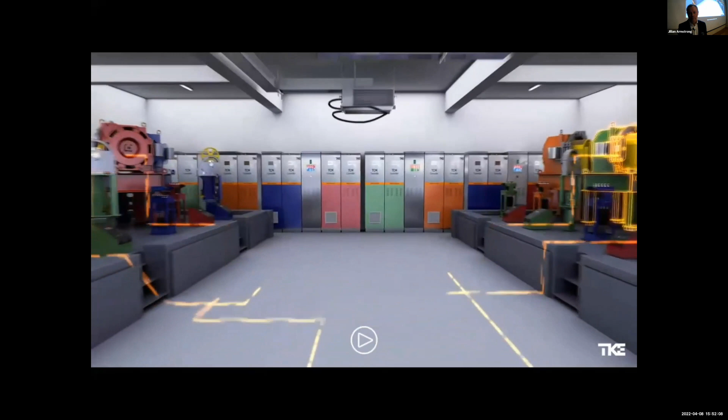Behind such a brilliant product, there must be strong engineering ability. TWIN's 4-level safety system is the best proof, through its destination selection control system with destination floor logic.

The control system monitors the distance between cars and the pass function. When the distance between the cars is smaller than a defined safety value, the system triggers the two cars' emergency brake.

Now, you can start at any time and experience the traffic system of tomorrow. TK Elevator TWIN.

So what is one of the possibilities that moving independent cabins allows architects and designers? It allows, first of all, flexible configuration and impressive design. With TWIN, we can impact one of the first things we see when we enter a building, or when we leave it, which is the different sky levels with different distancing.

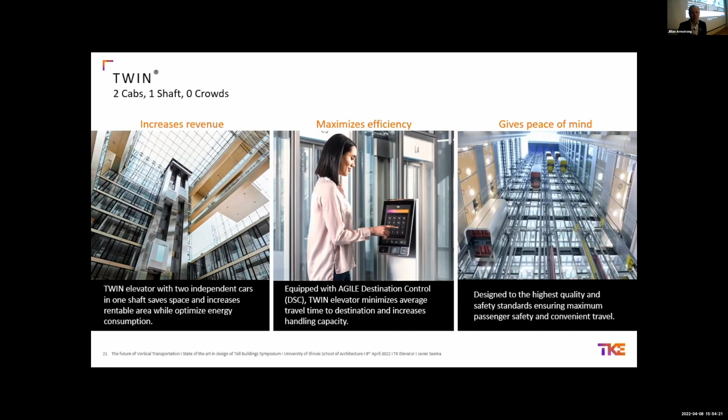It maximizes efficiency because in the car hall, we are already selecting our destination and the system sends us the cabin that will take us there quickest. And also, because of the safety level, it gives peace of mind when moving with independent cabins in one shaft. But TWIN also has other benefits.

Consider the impact on the embodied carbon of the building. This is a simple example we did for some buildings in London, one of our first TWIN references, where by using 2 independent cabins in one shaft, we were able to reduce the number of shafts from 14 to 8 multi-cabin systems, reducing the space needed for elevators by almost 3,000 square meters, and avoiding more than 40 tons of embodied carbon in the building, just considering the savings on the guide rails alone.

If we also consider the impact of not building the additional 6 elevator shafts, which is normally not part of our scope, the positive impact would have been even greater.

Some examples of how this could look in real case buildings: in cases where we had 20 shafts with 2 groups of conventional elevators, we've been able to reduce this to 12 shafts with 2 groups of 5 twins plus 1 conventional elevator. So in essence, we moved from 20 cabins to 22 cabins, but from 20 shafts to 12 shafts, so we can start to imagine the savings on the building core.

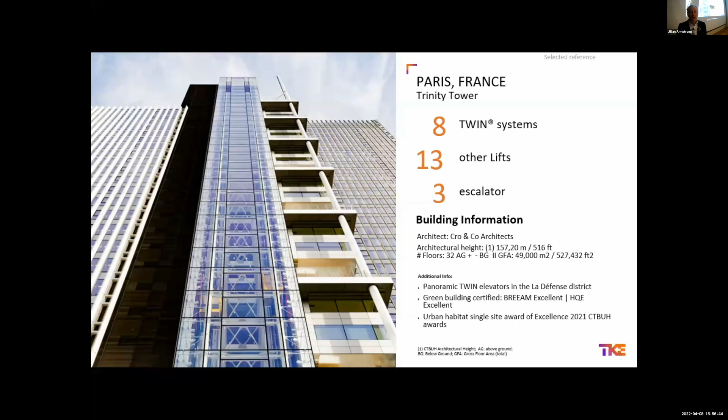By doing smart planning, we are able to achieve impressive designs like Trinity Tower in Paris, which won an award of excellence this year at CTBUH, with 8 twin systems, 13 conventional lifts, and 3 escalators. We can also improve the return on investment for our customers.

This is a real example: a 300 meter building in Asia Pacific with 61 floors and a population of 6,700 people, where by doing smart planning we reduced an initial scenario of 31 elevators with 4 double decks moving a population of 6,700 people, to a scenario of 16 twins, 5 double decks, and 2 elevators.

So we achieved a reduction of 43% in the elevator core, while also improving traffic, with an average time-to-destination improvement of 17.5%.

So we have been able to give better performance to the building and also increase the population that could be moved with this vertical transportation, from 6,700 to almost 7,000. And what is the benefit for the customer?

If we try to extrapolate the return on investment of this free space of elevator core that we give back to the owner, doing an exercise over 10 years using Knight Frank market price levels, we are able to achieve an additional return in cities like Hong Kong of almost 100 million euros, Shanghai, Beijing, Singapore, or Sydney around 50 to 60 million euros, or cities like Mumbai around 30 million euros.

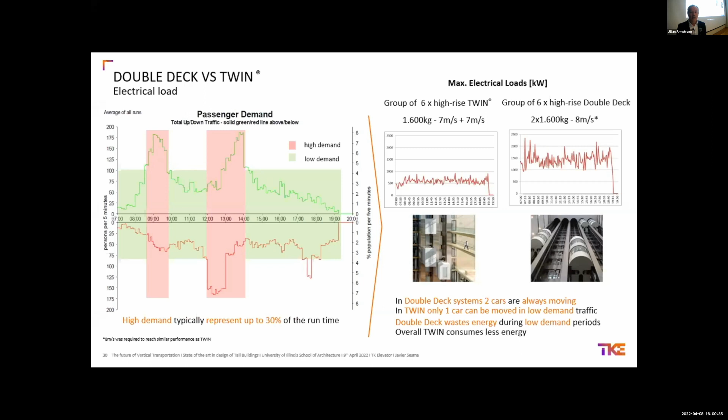So when thinking about high-rise strategy, what could we do? Maybe the first thing is using technologies like twin to merge the low-rise and high-rise groups. By doing that, we automatically reduce the elevator footprint. We can also do different arrangements, like overlapping the low-rise and high-rise groups using twin and express decks to the sky lobbies, as shown before.

And what about the future? For us, the future is probably about solving the holy grail of the elevator industry, which is taking the cables out of the cabin.

Since the year 2000, the number of super tall buildings has tripled. Despite the pandemic and other events, we still keep on constructing almost three times as much as we were doing almost 20 years ago.

It's also clear that vertical cities can free up space at the street level to make more livable cities. So how can we make this sustainable?

Just imagine we are able to eliminate the cable of the cabin, and we're able to propel multiple cabins, making them circulate within the building. So we create a system that enables architects to design buildings without any limitation in height, shape, or type of mobility. That gives them multiple possibilities, and that's why we call this technology Multi.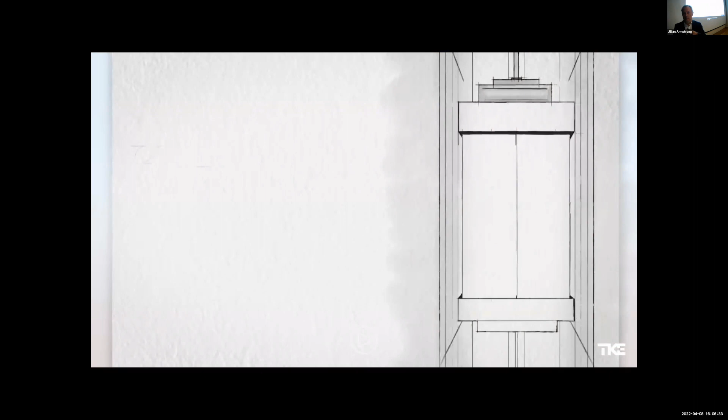2003, the twin elevator changed the industry: two cabins independently in one shaft.

In the future, more and more people will live in megacities. Today, building development is constrained by the forms of mobility available. A revolution is required.

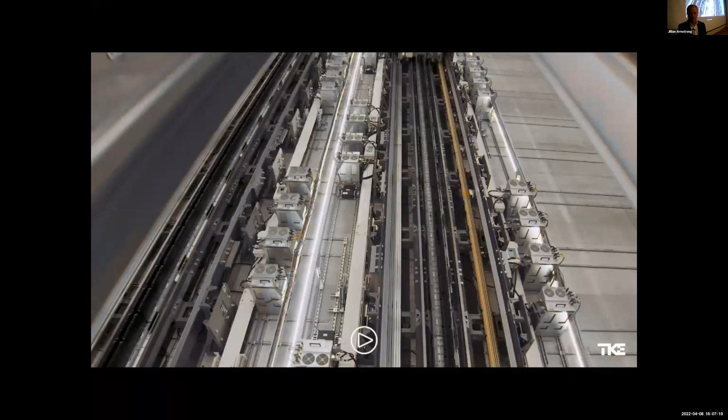We started to reinvent the elevator concept. What if we were to omit the rope and have direct drives as part of the elevator cab? What if we were to provide more than two cabins in one shaft and let them circulate in the building? What if we were to invent a ground-breaking system enabling the cabins to move sideways?

No limits in height or shape — there are multiple possibilities. And that's why we call it Multi.

So what are the possibilities of this system? Let's imagine a building at peak times. We might have six shafts where inside we're moving 24 cabins. Typically, what we've seen as probably the most efficient transportation system is a semi-continuous system, similar to the paternoster.

But what happens when it's maybe 10 or 1 o'clock at night and we don't need that transportation capacity? What we can do is switch to what we call off-peak mode, where using the exchangers, we take some of the cabins and park them in what we call a garage.

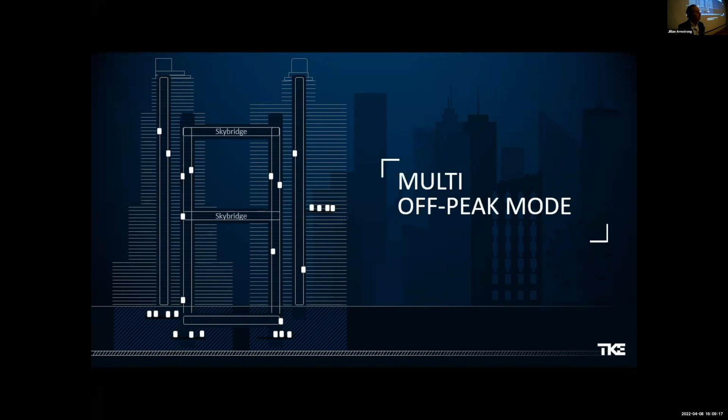So Multi, in short, means multiple cabins in one shaft, smaller shafts — because the concept of Multi is point-to-point destination — fewer shafts, and no machine room needed at the top of the shaft, because what we're doing is propelling multiple cabins. When we presented this technology, the press called it 'Charlie and the Chocolate Factory,' because that's essentially what Multi is about.

No limits in height, structure, or building shape — it's a digitally native system. In order to propel cabins, we know exactly where every cabin is and when it's coming, and we energize that part of the shaft. So it's a fully digitally native system, and we can choose either to reduce the building footprint or free up space for additional income.

MULTI also can increase the capacity, reducing the elevator footprint. Obviously, that could be a benefit on embodied carbon of the building. Also, it's quite interesting that probably using similar energy to a conventional system, the peak load is much lower because we are only energizing the cabin which is moving.

We can regenerate energy when we are going down. We are using the linear motors to create energy and plug it into the grid, and we can adapt the transportation system to the demand.

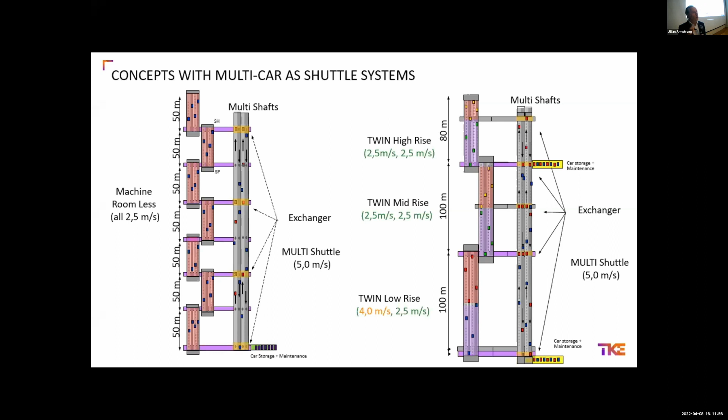This is some of the casuistic we see as of today. We have tenants like technology companies where the biggest demand is interfloor traffic, because of the way these technology companies are working in the workspaces.

If we compare some of these concepts, all of these are scenario exercises we have done for real customers. Just comparing, for instance, a double deck shuttle versus a MULTI shuttle, we can save about 20% of the elevator shaft, and comparing the double deck for the local shaft versus the twin, about 30%. So twin and double deck is already a winning solution for vertical transportation, but probably MULTI and twin combined together is even better.

And what else? Our vision is that in the future, moving people and data will push the boundaries of the building envelope. We truly believe tall buildings will not just be buildings on the surface, but will be connected to the rest of the public infrastructure.

And for that, technologies like MULTI can play a very interesting role, connected directly to public infrastructure. We have discussions in cities like London where they wanted to build a new metro line, and how do you bring people from 70 meters underground to the surface? You don't have a vertical node to bring people to the surface, so you need to move in different directions.

We clearly see that the future is going to be driven by data, because data can really advance and extend the life cycle of our equipment between 20 to 40%. We also need to consider that by 2030, about 75% of the working population will be digitally native, and they would like to interact with our vertical transportation systems differently.

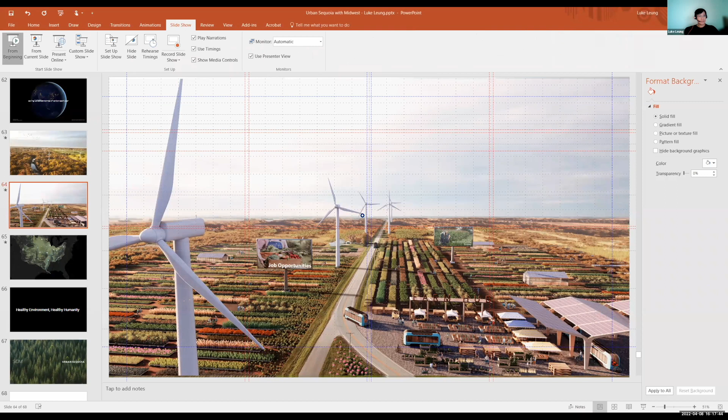So I think today we heard from different people, from the building architecture to construction, to the wind, to the elevator. Finally, maybe we will look beyond the immediate to the future, maybe a few decades down the road even, to look at some of the issues we're going to have to resolve in sustainability.

I don't think we need to tell you environment is an issue, but the point here is in 30 years, we're going to have to increase about 2 billion people on this planet. And it's going to peak out at about 11 billion people potentially by the end of this century, 50% more than the population we have now.

You really need to chew on that a little bit, because if you are in architecture school and if you're an architecture student, congratulations, plenty of work for you, because the United Nations is projecting by the year 2060 we're going to need 2 times the built area of what we have right now. All right, we got a job for you.

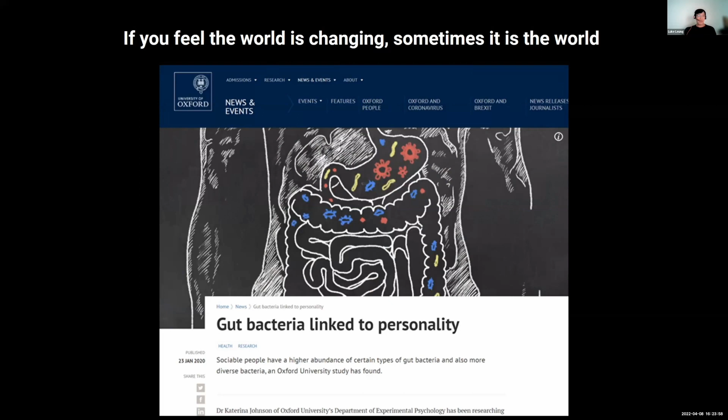It controls our immune system, digests our food, helps our brain development, and eliminates pathogens. In fact, a University of Oxford study links the gut microbe to your personality. So if you think the world is changing recently, it may not be, sometimes it's not the world, sometimes it could be you. But other times the world is actually changing, as the gut microbe of humans is changing, and their personality could also be different.

If you wonder why there are so many chronic diseases in recent days, from diabetes to other issues, guess what? Recent studies suggest your gut microbe can actually create these diseases if it's not digesting your food correctly. So maybe one way to address that is to transplant this gut microbe. Johns Hopkins University actually successfully used microbes from one healthy human, transplanted to another, and they suggest on their website the cure rates could be over 90%.

So as architects and engineers, we are not solving just an issue inside the building. We are solving a bigger issue within our realm of possibility. So net zero architecture is not enough. We've got to go beyond that into buildings that can act more like a tree, helping the environment and people. So we suggest, and this is actually maybe an aspirational design, the idea of an urban sequoia to sequester carbon for a better environment and also create healthier food for people.

So what is an urban sequoia? It's a building form that can be optimized to reduce carbon emissions from where we are today to over 300% reduction in carbon. Now remember, this is a little bit aspirational. There's some science behind it, but there are also elements that go beyond some of the possibilities of today.

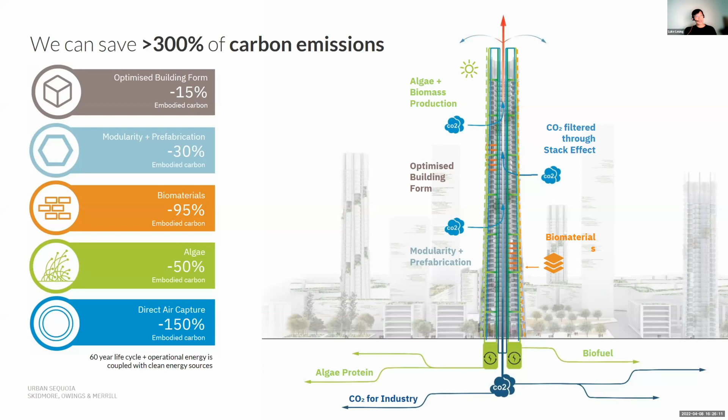So first, optimization of building form and also modularity. Those are the first two things. And then the use of microbial elements, use of plants like algae to capture some of this carbon, and finally direct air capture of carbon dioxide.

So optimization of building form, number one, we can roughly have 15% carbon reduction. Some of the speakers earlier talked about the beauty of certain shapes. For example, a round shape tends to enclose a lot more volume with a minimal amount of skin, and it could work better compared to a rectangular shape in terms of wind and so on.

The second element is the modularity of the building components, to minimize waste by constructing these elements away from the construction site and putting them together to minimize waste. But I would like to focus a little bit more on the integration of these components to minimize the embodied carbon.

Something you can see like this with precast panels that could look aesthetically pleasing but also functional. Now, these three technologies that we're going to talk about next are actually the crux, or the central core, or the central suggestion of the urban sequoia.

Number one is the biomaterial, transforming building from what we know today to more bio-based material. Now we are using a lot of wood today. What if we had more bio-based material to create that carbon sequestration? In this case, it's bio bricks, which could be an aggregate of bacteria with aggregate and water solution to form this biomaterial.

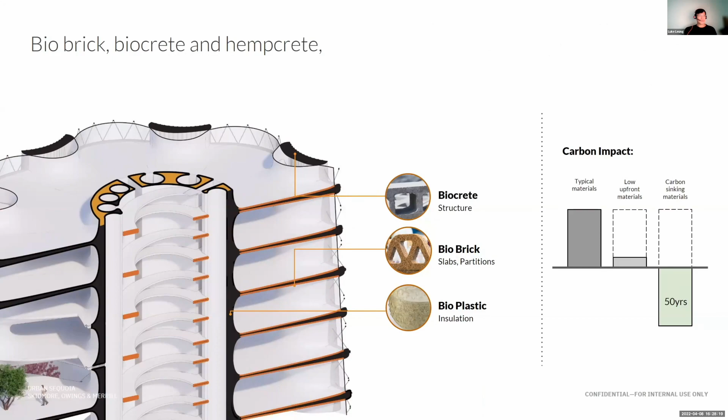Modular elements are always helpful to minimize waste. The second piece of this urban sequoia is about having the building grow elements we need for the environment and for people. We pick algae because algae is a really fast-growing element.

So we can have bioelements with the sun and carbon capture to form algae. The algae can create power, store the power as fuel, create food, and jet fuel and fuel for ocean liners. Because one of the issues even electrification cannot solve is the fuel we need for airplanes and container ocean liners. They need fuel that is not electric-based today. So we still need some sort of fuel for those elements, heating for the building, and also products for our buildings.

So this is not new. Many buildings have considered algae as a facade before.

So the final piece of this urban sequoia is active carbon sequestration, using the natural forces of tall buildings to go through carbon capture to take carbon out of the atmosphere and create useful material for the building. So this is how it works: as the air flows through the filter of carbon dioxide, it captures the carbon and forms useful material. We can utilize the strong wind in terms of tall buildings from the stack effect, or the horizontal wind because of the elevation.

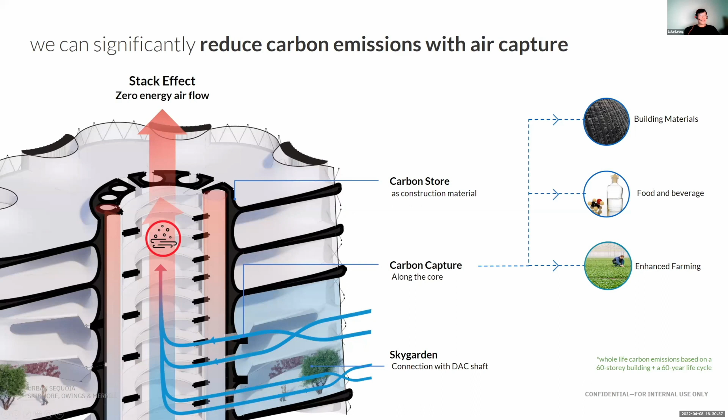And then form this product from carbon as food and beverage, or building material, or enhanced farming through the carbon we capture. So you might think this isn't happening yet in many buildings, but guess what, this is from the United States Secretary of Energy.

She suggests we must deploy approaches such as emerging direct air carbon capture technology to address the issue, because the carbon issue is happening way too fast and we're not going to solve it through natural means alone. She's suggesting we invest money to do this carbon capture.

So you might ask, will this technology actually happen? Well, 15 years ago they had a similar question about PV farms, but as PV farms gained momentum, they're applied to many buildings today. We don't know whether carbon capture will be one of those vehicles, but we should certainly keep an eye on it, because of how fast we need to get to 1.5 degrees C by 2040, which is 20 years away. Growing trees alone is not going to get us there.

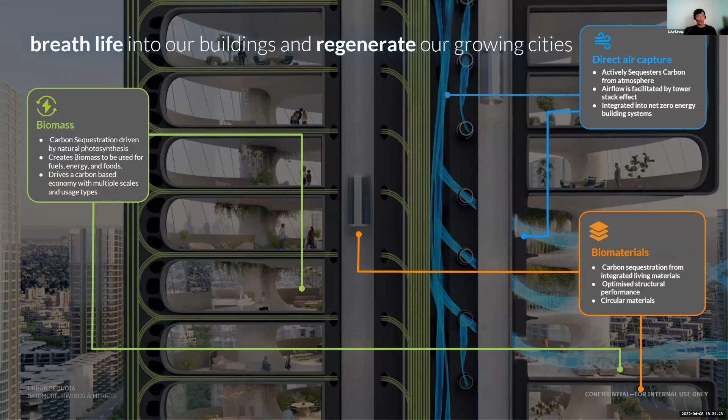So could there be carbon capture farms in our buildings, utilizing our exhaust or the high wind speed of tall buildings? There are certainly projects we are proposing to achieve net zero carbon in some of these tall buildings. This is how different technologies can be incorporated into an urban sequoia building.

And how it could achieve a 300% carbon reduction in its life cycle through optimization of the form, modular construction, and use of algae, bio-based materials, and carbon capture. This could be applied across the building industry.

So this urban sequoia, just like a forest of trees, doesn't operate as an individual tree, it operates as a forest. As a building industry, the urban sequoia can create material used by other buildings. It acts like a forest, transferring material between different urban sequoias, creating a food source that could be shared, creating agriculture inside our urban environment to lessen the burden on our farms so they can be more regenerative, and creating valuable biofuel for airplanes and ocean liners to power their journeys and store energy.

Because in an all-electric world, a place like Illinois will most likely see dual peaks, peaking energy use in daytime summer and nighttime winter. We'll need to store that energy for non-peak times, capturing peak renewable energy generation to store for times of off-peak renewable generation.

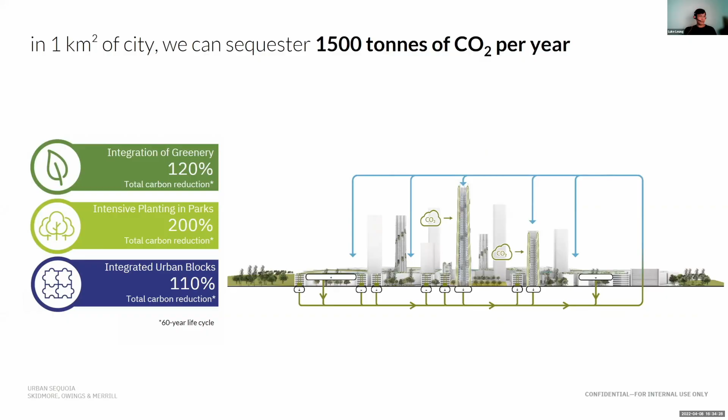We can save about 1.6 billion tons of carbon per year, and change our farms to feed 11 billion people through a regenerative farming system, not the way we do it now, which will erode the Illinois topsoil. In a few more decades, much of the topsoil will be completely gone, and we will need a lot more fertilizer for our environment.